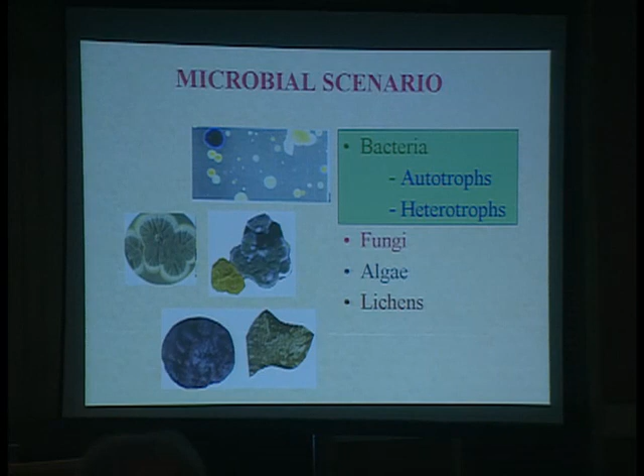They spread in the environment and pollute it. The ability of the microbial strains to produce powerful enzymes which accelerate the rate of reaction between substrate and product are the factors that must be accounted for.

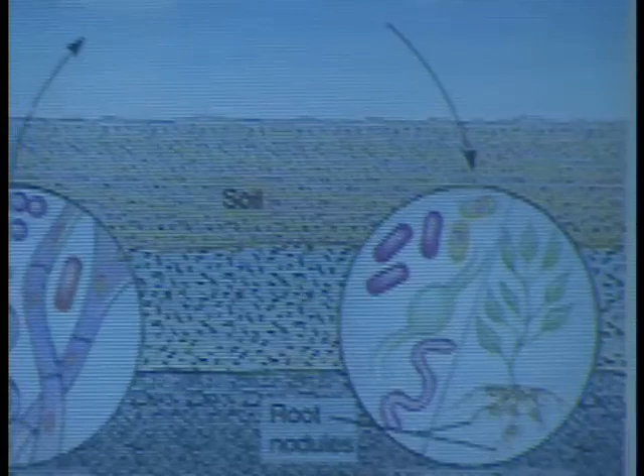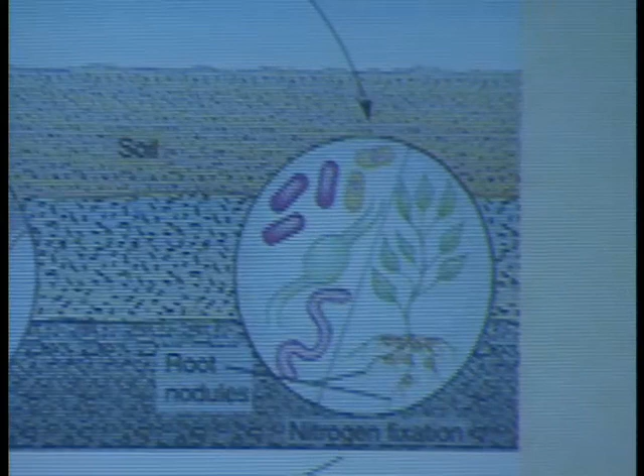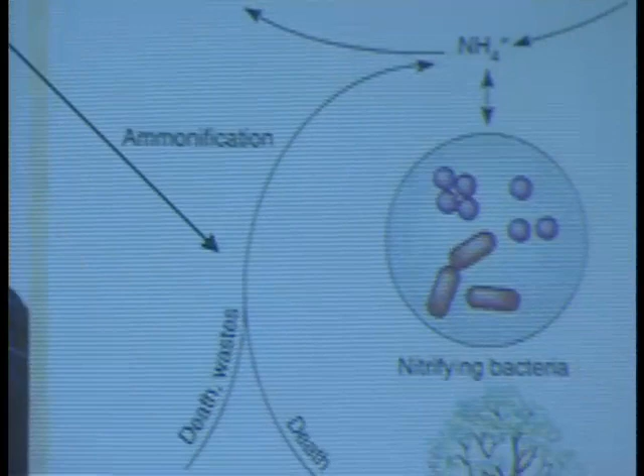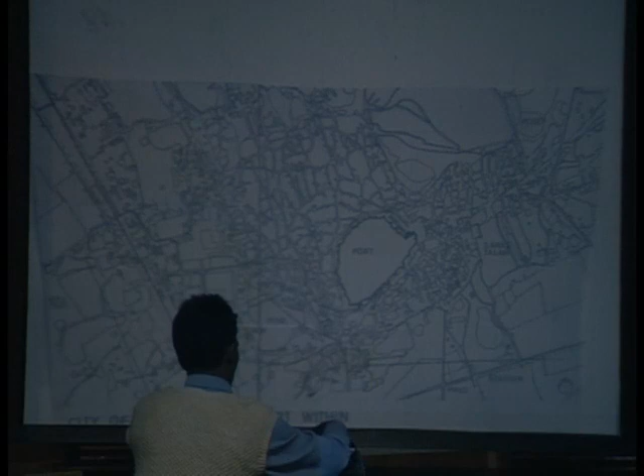Thanks. Aqueducts, channels, and the axial layout always had a water body as their focus, evident from the centrally located gardens with fountains in the complex, creating a comfortable microclimate. Hence the paradox: on one hand water was scarce, and on the other it was highlighted as a principal design factor.

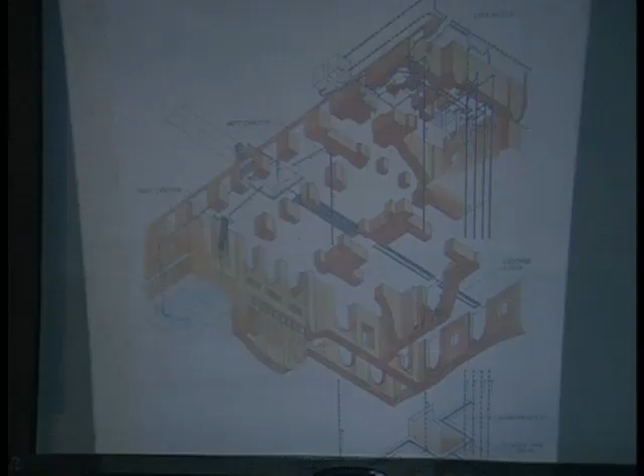This is where we were trying to find out the water systems. We found on all the terraces some 6 holes, and perhaps we'll have to begin to write the story of these 6 holes and where all the water is going, because there are clay pipes. You can't use a laser system, you can't use a metal detector, so there will be a lot of investigation once the water system study is complete.

You mean the rainwater harvesting? No, the terraces—fountains, the running of the fountains as well.

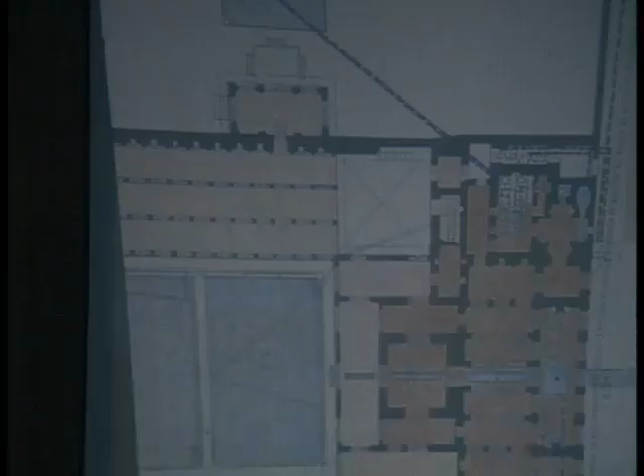There is a heating system for the water, and a tepid area, like a Greek bath, in one of the Rajasthan hot areas. Things were transported, and we are trying to design it for even the lighting system. Some new doors have been placed for new facilities, because now it will not be a palace—it will be a place for people to visit.

While we were doing the conservation, we had a lot of students coming in, and we used to have seminars over there. That's it, thank you. We use our knowledge related to history of art and architecture in India, of which there have been many studies.

But for us to appreciate this properly, considering that the objective of this conference is not only to look at the art but also at the science and engineering of the monuments, what we need is an interface between history of art and architecture with history of science and technology.

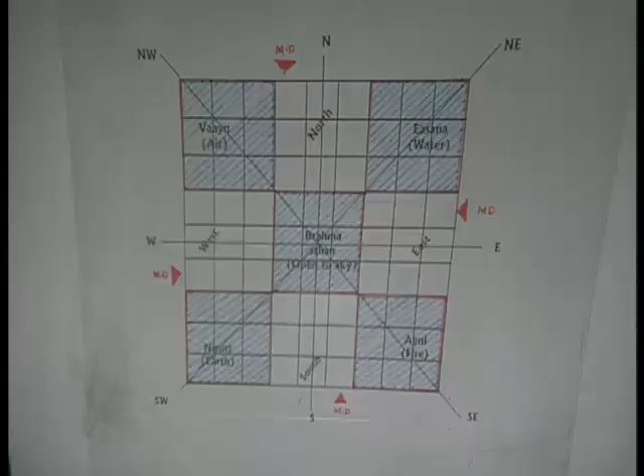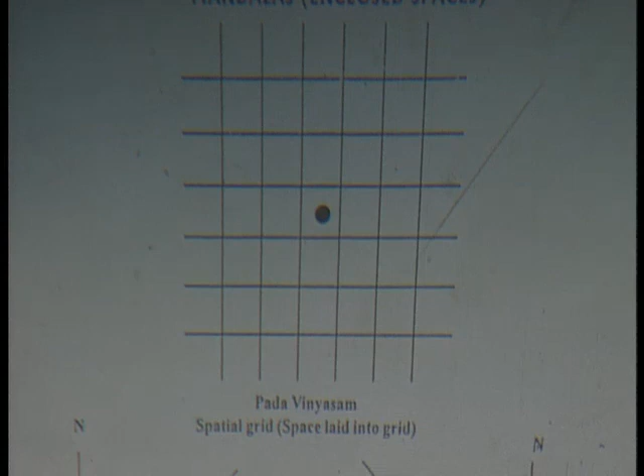Running all over the surface of the earth, just like latitude and longitude, creating the energy grid patterns. So with respect to this, if you construct a building...

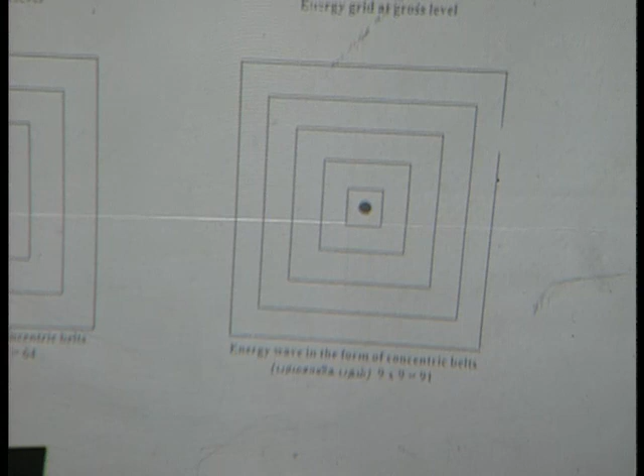The second important element is the main door. The position of the main door, in any direction, should be at the fourth grid from the left of the residence.

This is the typical residence building. As told earlier, we were taking the perimeter of the house and the wall, and inside those, five primary elements are there. The central portion is called the Brahmasthanam, as told earlier. There should be no load, beam or columns crossing it, and it should be entirely free space.

Detailing I can't explain due to insufficient time only. This is the first floor of the residence.

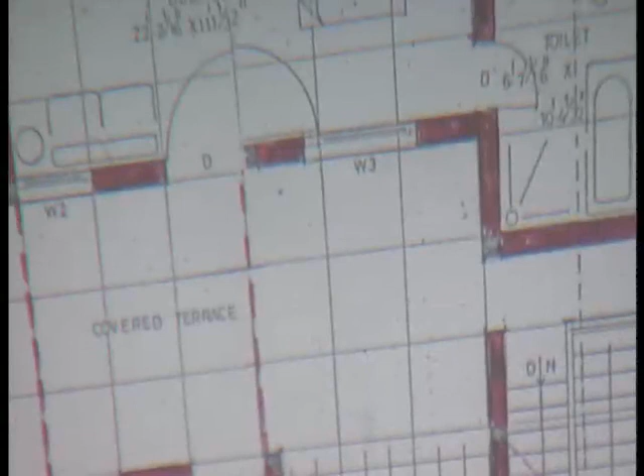With respect to this main mother wall, taking this grid inside and spreading it outside, extending the staircase and the toilet portions also, that you can see now, in the direction of true north.

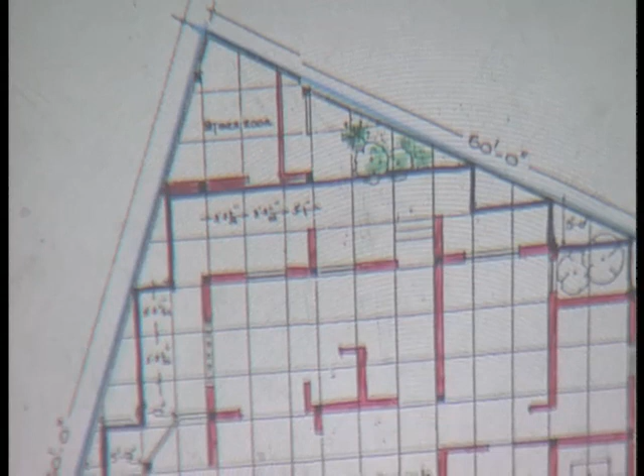Whatever we have got in the energy grid lines inside the periphery wall, the same energy we have spread all over the sides, and wherever we got the irregular shape of a triangle, that we have converted into a garden or car parking place, something like that.

This is an elevation of the same house. And this is one more residence.

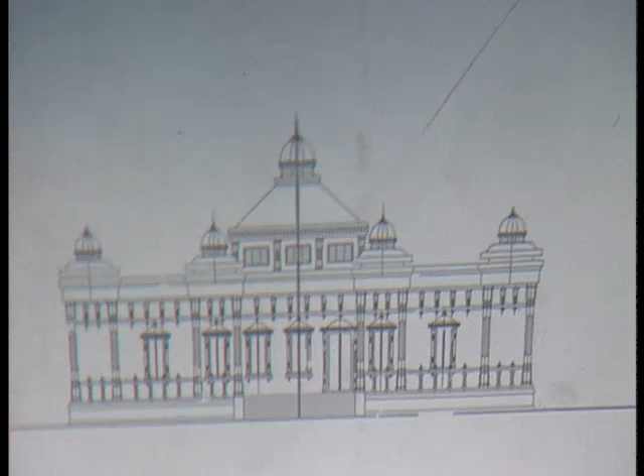It covers totally 7,000 square feet, and we have constructed it strictly according to the Vastu, with the central portion called the Brahmasthanam.

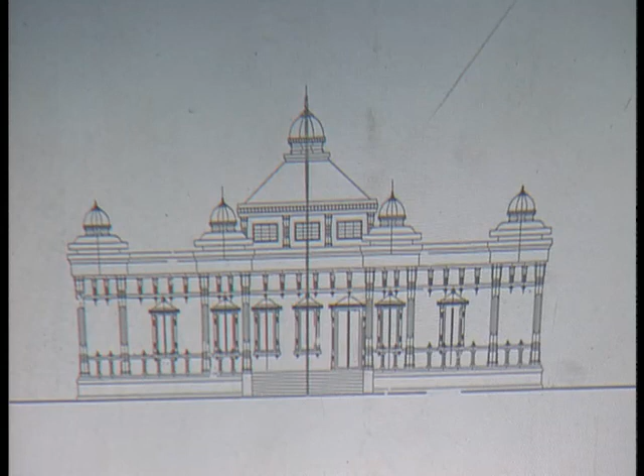Here the client is provided with high-raised ventilators at the top. On the top side you can see that we made some sloping roof and kept the high-raised ventilator below the sloping roof, and made some beautiful architectural treatment using the Dravidian architectural style.

This is also a residence at Colombo. This is the first floor of the same plan.

I'm interested to know the conceptual meaning of each and every god form, and temple structures like Vimanam, Garbhagriham, Gopuram, etc. And when giving clarification, they had no words to describe a temple or how it relates to each other.

It not only created a balanced visual effect, but also brought joy to the inner spirit. All the visitors of the temple were convinced of the highly spiritual atmosphere inside, which is created by the proportional spatial forms.

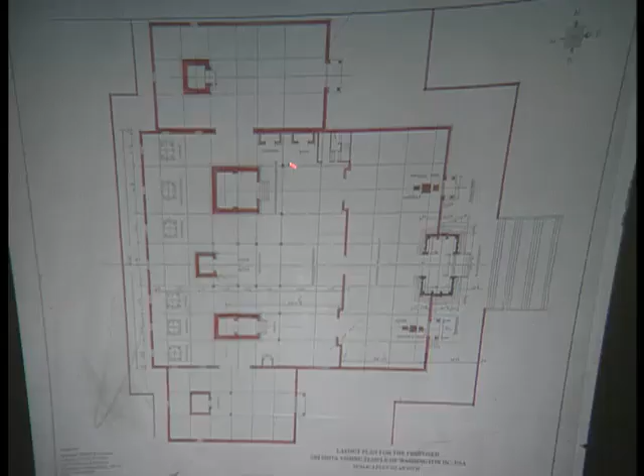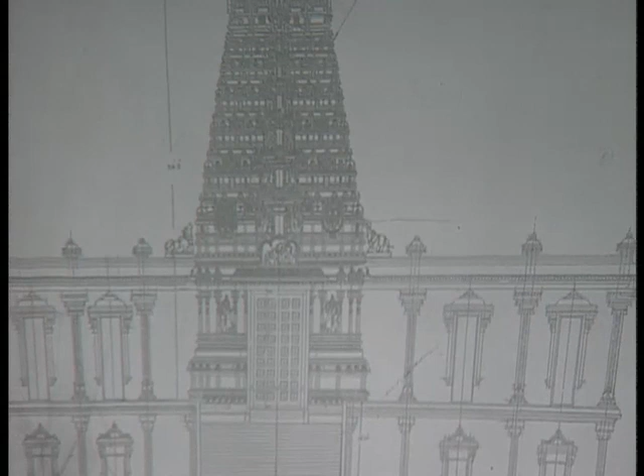Now we are looking at the front elevation of the temple complex. One high tower is raised for both temples, symbolizing the unification of the Shiva and Vishnu concept.

This picture you see was taken at the initial stage of the tower work. The concrete shell was built by the American engineers as per the Sthapati's design.

The following picture is the finished structure of the shilpis with brick and mortar. The high tower adorning the different forms of Shiva and Vishnu on both sides of the tower can be seen. The height of the tower is 56 feet. It is one of its kind built in the United States of America.

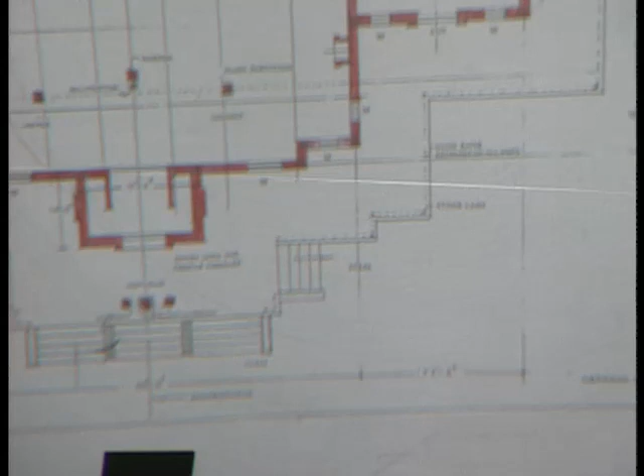It took 3 years to complete this temple complex with a team of 20 shilpis.

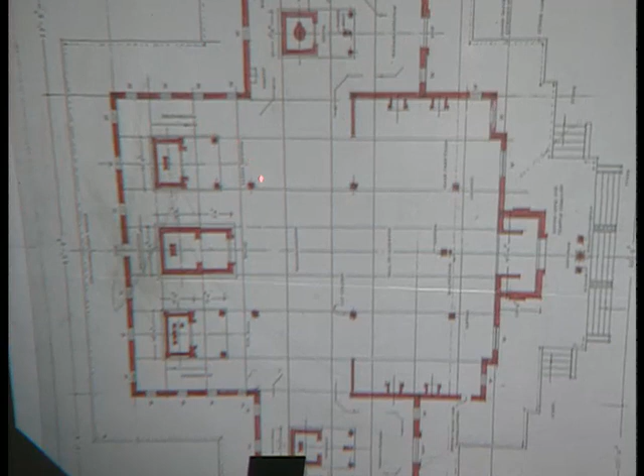This temple has been built on 6,900 square feet area.

This picture shows the complete front view of the temple with gopurams of the main sanctum. The next one is the aerial view of the whole temple building with a single high tower of 60 feet height. This project took 2 years to complete with 15 shilpis.

This is a concrete shell built for the Rama temple by the engineers of Illinois as per Sthapati's design. The following is the completed structure by the shilpis with a tower of 75 feet high, the highest tower built in the United States of America.

This picture again shows the concrete shell built by the engineers of Illinois to build the Ganesha Shiva Durga temple in the style of Orissan architecture. Below is the completed temple structure with gold electroplated stupi kalasams specially manufactured for this purpose.

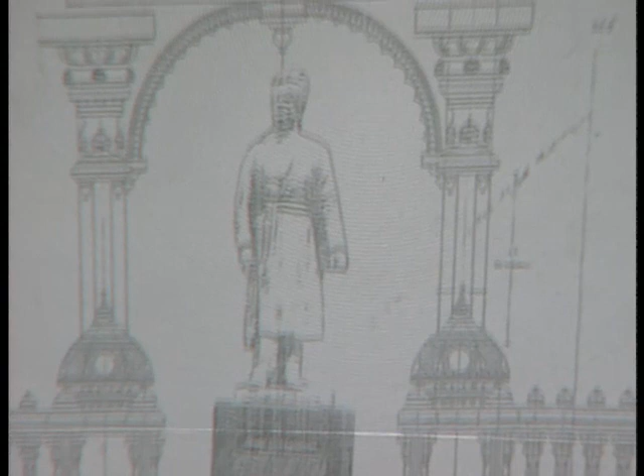This picture is the front elevation of Sri Swami Vivekananda Memorial Mandir in Illinois, where the mandir was built to accommodate Sri Vivekananda Swamiji made in brass. We are happy to inform that today is the consecration ceremony of this holy structure at Chicago.

This picture shows the front elevation of the steel structure with 4 pillars. Below is the rear side elevation of the structure during the construction by Indian shilpis. Let us tell you that this is the first time in the USA a memorial mandap is built for Swami Vivekananda ji.

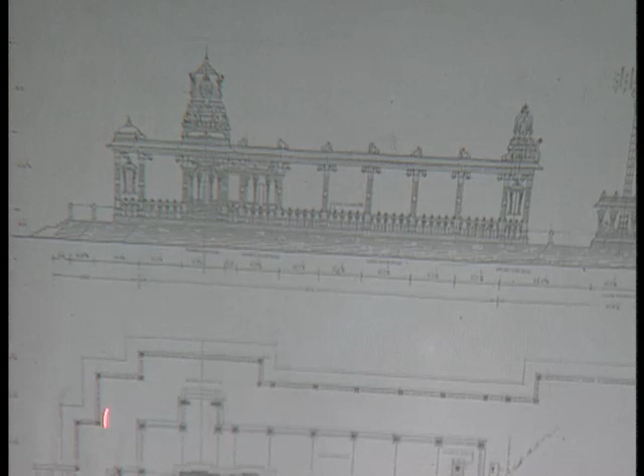This layout you see is a Shiva temple, very unique of its kind. This temple is under construction fully in white granite stones. This temple project is sponsored by an American Saivite saint called His Holiness Gurudeva Shivaya Subramuniyaswami of Saiva Siddhanta Church, Hawaii. This temple form, top to bottom, is carved in granite stones near Bangalore, Karnataka.

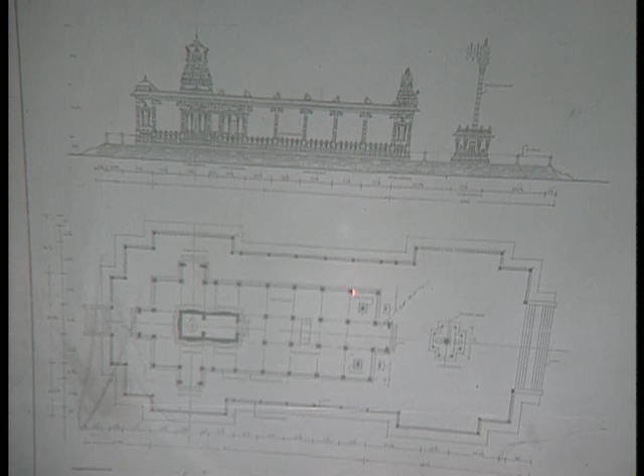All the carved pieces are shipped to Hawaii, where our team of shilpis are carrying out the assembling work. The 40 pillars with different ornamental motifs and a small tower are designed to give an effect of structural symphony, achieved by Vastu technology. A Dvajastambha is also provided.

The Garbhagriha of this temple will house a crystal lingam of 3 feet high, which is presently kept in a Balalaya in Kauai Aadheenam. The style of architecture adapted in this project belongs to the Chola dynasty of the 10th century AD.

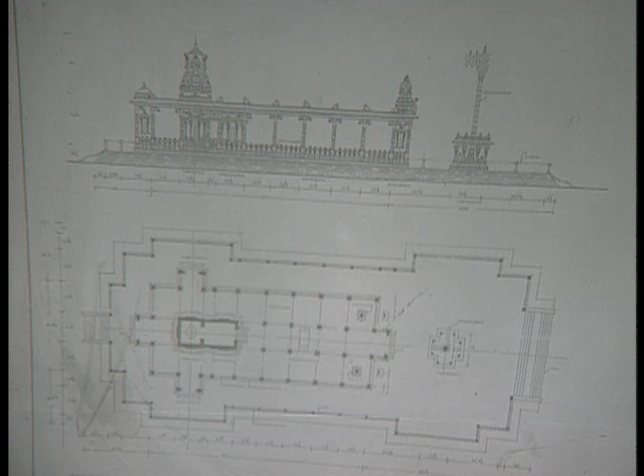The whole idea is how the water system works in a desert situation, where water is so important that the topography and everything is used to conserve every drop of water and make it available to the city for the rest of the year. I will cut out the more technical part of urban contours and topography, but how, in order to do this, how to save water and supply it to the city.

Either cities have gone to the water, in the sense that we build cities next to the river, which is a standard pattern - wherever there is a source of water, we build there - and at times we bring water to the city. The later part will be about bringing water to the city.

Some architectural features are tanks. Water tanks are a common feature for most of the temples, particularly in South India, and also as pleasure sources and pleasure pavilions.